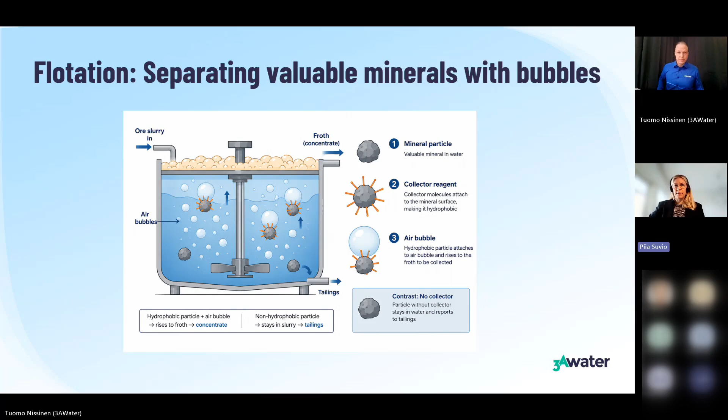I will now move to discussing why water quality is important for flotation, why it matters more at the current time, and what kind of solutions we can have for the water quality related issues in flotation. Well, flotation is very sensitive to water chemistry. In fact, we could say water is a reagent in its own right. And why does water quality matter more today than it did before? Well, water is getting more scarce, and there's also a huge pressure from environmental, social, and governance related matters. There's higher water cost, and there's also a lack of availability of water. Hence, we need to recycle water more.

And one of the reasons we need to do it more is because there are discharge limits that put pressure on how much you can actually discharge to the environment. So we need to really find ways to increase water recycling. This then often leads to closed water loops, which is really a preferred way of approaching operations. But this leads to an issue of accumulated dissolved species in the water. The complexity of the ores and lower grades are also creating an issue, and this is in fact the number one issue that operations are facing today. This is leading to higher processing demands and also resulting in increased water consumption in itself.

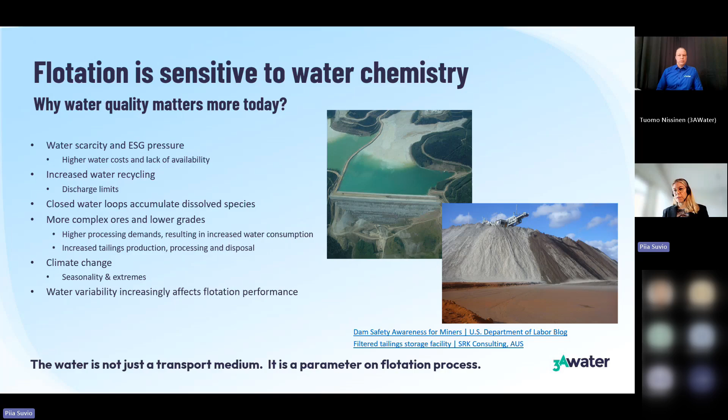Water is not just a transport medium, it is a parameter in the flotation process, or a reagent, as I mentioned before. Well, what are the variables that matter? First of all, it's the chemistry of water that is the issue here. It interacts with the reagents. It also affects the particle-bubble attachment, as well as the froth stability and the transport of the froth. All of these impact the flotation performance itself.

If we look at the individual water quality variables that matter the most, we have first and foremost the pH. The pH window often governs where the best flotation performance is in the process. Then we have certain dissolved ions that cause issues, in particular calcium and magnesium, which are hardness-inducing ions, and then sulfate. The amount of total dissolved solids is an issue. These directly reduce the recovery.

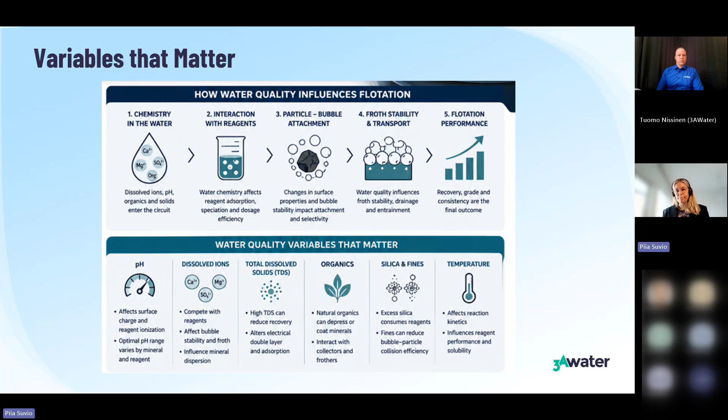Then we have organics, which can depress or coat the minerals, for example. Silica and fine suspended solids in the water consume the reagents and can also reduce the bubble-particle collision efficiency. Then we have the temperature. This affects the reaction kinetics, and temperature is particularly important with sulfide ores because it can lead to a change in the pH, which can then alter the pH window. So temperature in some cases can be a huge issue.

We have a bit of a case study here: Boliden Kevitsa data. Boliden Kevitsa is maybe the most studied in terms of the impact of water quality in flotation, at least in Finland, but probably in the wider world as well. Boliden Kevitsa is an open pit mine located in northern Finland. It has a low-sulfide mafic ore, and they use sequential copper-nickel flotation.

In 2012, they decided to start recycling the process water through the tailings storage facility. You can see on the right what happened when they closed the loop, so to speak. The conductivity of the water started to vary between seasons. Going into spring and the warmer months, the conductivity increases, and then it starts to decrease again, but with a delay, going into the winter months. So the impact of water quality carries over beyond the period where it occurs.

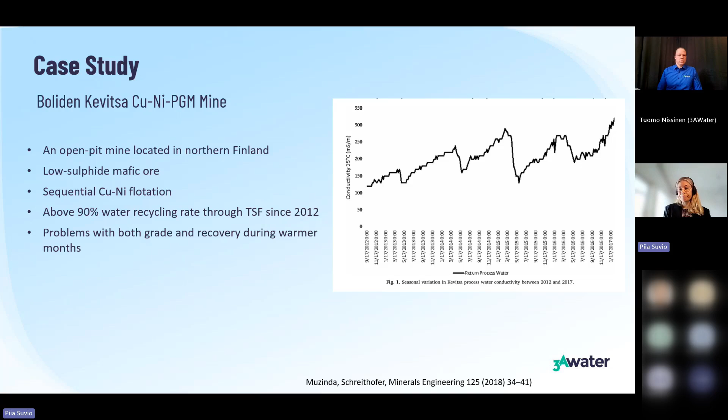When they investigated this further, they realized that the long residence time in the tailings storage facility, the tailings dam, allows various reactions to occur in the water. Since this is a sulfide ore, the higher temperature increased the kinetics of dissolved species oxidation, resulting in mine drainage, a very low pH acidic phenomenon. The oxidation of sulfur species then led to this pH drop.

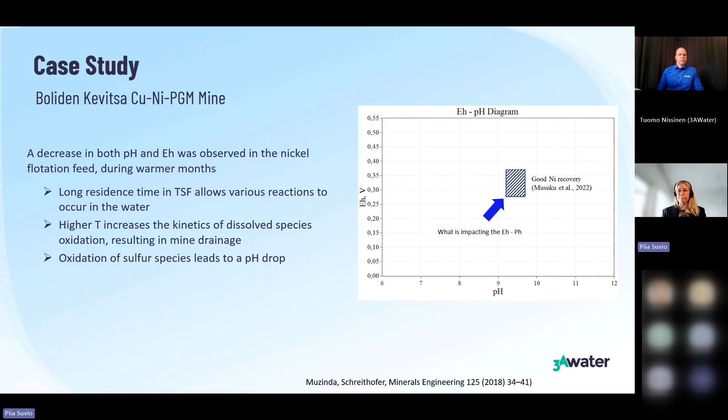So now what can we do? I'm not going deeper into Kevitsa, but there was a major drop in recovery during the warmer months. This is something they have been working on very intensively, and I believe with good results, so very good on them. Now I'm moving into the solution, having given you first an idea of the issue, what can happen, and which quality constituents cause issues in flotation.

What can your solution look like? I would say prioritize your actions. If we look at different ores and the behavior of the froth, trying to understand what in the water is causing issues, we have to look at every ore separately, every production, every location of the site, and it becomes a huge matrix where almost every site has a different recommendation on what to do. But what I'd like to see is more general recommendations on what to do.

And the first one is really use good quality of water in general. So look at your waters, do some water management activities, look at where you have good enough quality water, where it is poor, and decide accordingly where to use the water. Here I have an example on copper sulfide flotation. So what we have here is good quality water, moderate quality water, and poor quality water.

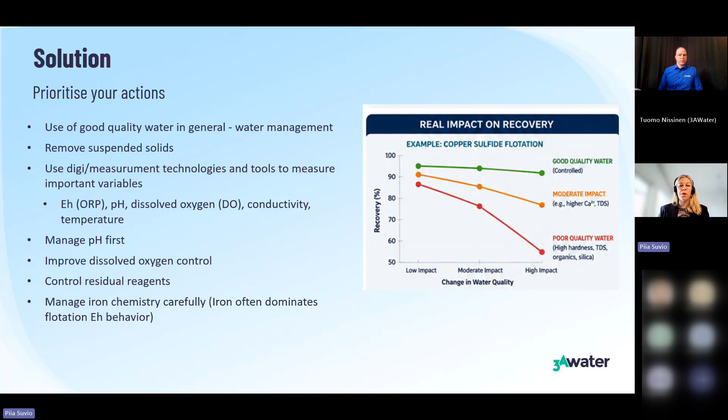And if I have to mention one species of impurities in particular on its own, it's the iron. So iron chemistry is important because iron often dominates the flotation Eh behavior, the redox behavior. And Tuomo will come to how you can work here with iron a little bit later. One slide later, because this is my last slide.

So, outcome. What happens when you have a high performing flotation circuit and concentrator with good quality water? You have higher recovery and grade, both of them, not just recovery, but also the grade. You have less loss to tailings in terms of the product. You have better process control, optimized reagent use, so you're also not losing in OPEX through the reagent.

You have sustainable operations, which then means you have an improved image as an operation, and also last but not least, maybe the most important, improved profitability. So the focus on water really matters if you want to have sustainable, less risky and profitable operations. Over to you, Tuomo.

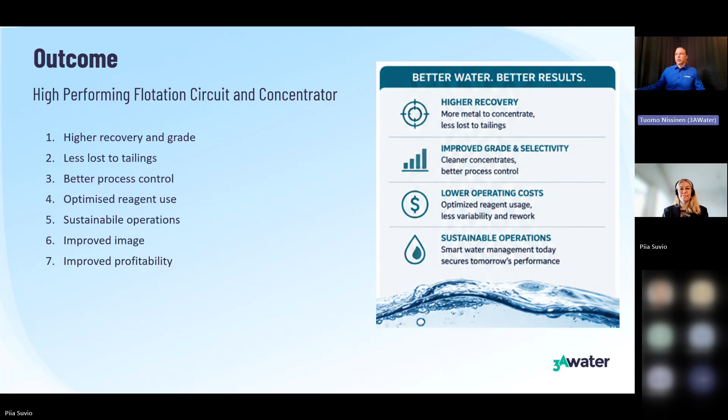Yeah, thanks, Piia, for this very interesting talk about the water quality overall. Let's go now a bit more into the dissolved metal part of this. So the dissolved metals are often the blind spot in many industrial operations, since they are only routinely analyzed in the labs and results are then arriving hours or maybe days later, depending on the logistics.

So there is no operational information about the dissolved metals, for example iron, in the process waters, even though these dissolved metals can accumulate in recycled waters and they can vary for many reasons, like Piia explained, weather conditions, seasonal changes, or ore variability. And these dissolved metals can affect the flotation selectivity and recovery in many ways, also by activating or depressing the mineral surfaces. So this is an uncontrollable variable in the process without visibility on it, and can be a source of recovery or selectivity issues.

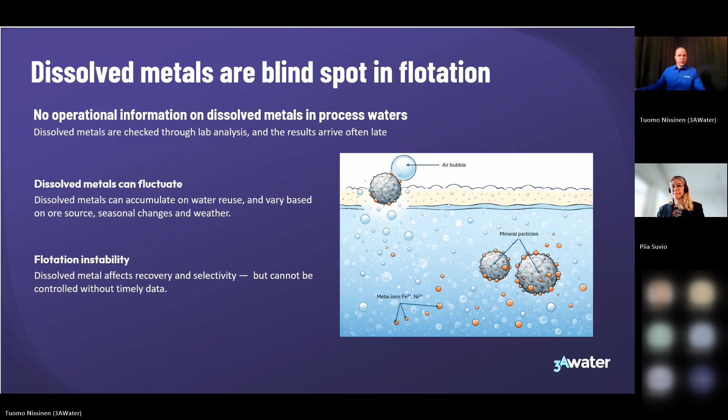So the solution for this is called a multi-metal water analysis system that allows the monitoring of metal levels and decision making based on this information, all in 15 minutes. We want to bring the lab water quality information to the hands of the process teams.

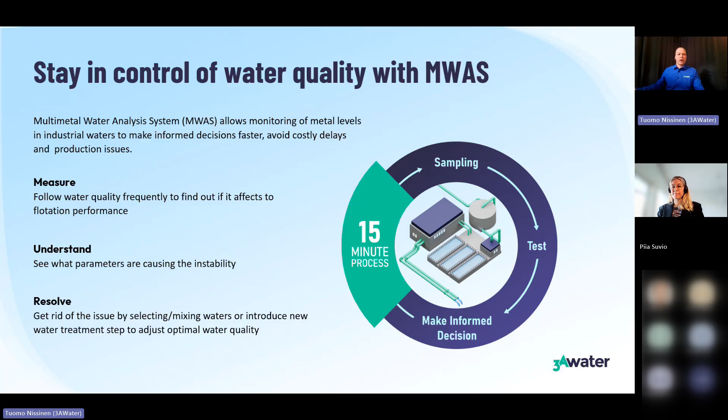So first, you measure with our solution frequently to see if unwanted dissolved metals have an effect on the flotation chemistry, and then to understand what parameter is causing the instability in the process. And finally, to resolve the issues by selecting and mixing the waters properly or introducing new water treatment to get rid of these dissolved metals that are causing issues in the process.

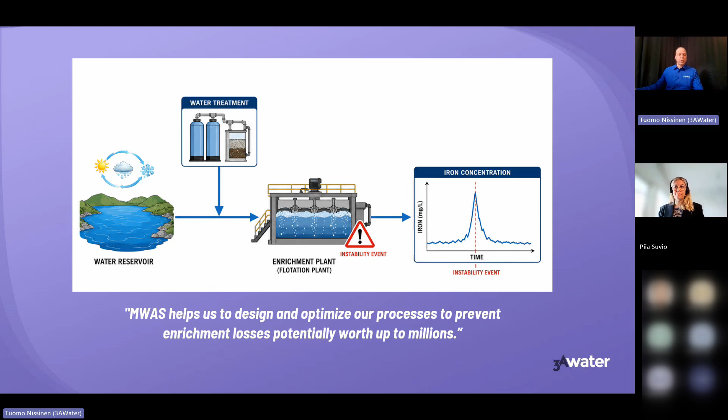Finally, I want to say here that we are looking for concentrators as pilot partners where the flotation performance varies due to water quality and dissolved metal reasons, or without clear explanation. Our pilot approach is a three-phased project. We first plan the monitoring and define the KPI related to flotation where we compare the water quality.

Then the system is validated, hardware delivered, users trained, and routines established on the site. And then is the independent use phase at the customer site. And finally, we compare the water quality against the selected KPI and identify if dissolved metals are a meaningful variable in your process, and estimate together with the client the value of the real-time dissolved metal information, what actions it can create for the process and how it can help you.